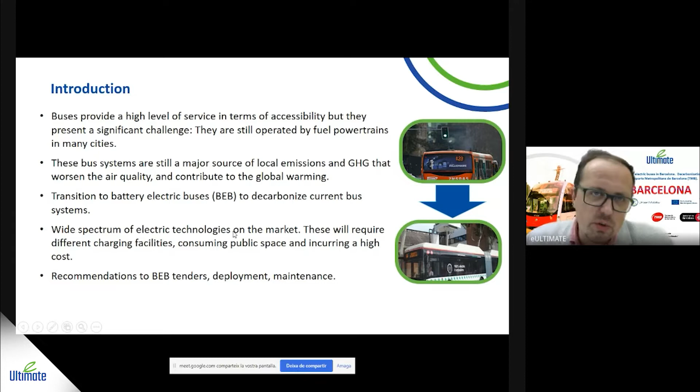From this wide spectrum of electric technologies on the market, we would like to identify which electric technology may match the constraints and the characteristics of each city. So our ambition is to provide this vendor agnostic decision support tool. And by vendor agnostic, we mean we are going to compare the performance of electric buses, but not in terms of branding or the name of one vehicle manufacturer brand.

No, we are going to compare performance, okay? For instance, charging schemes, overnight charging with regard to opportunity charging, batteries of capacity of 150 kilowatt hours against huge capacities of 400 kilowatt hours. So the idea is to provide this vendor agnostic decision support tool for assisting these cities and bus agencies in the deployment of the most suitable electric bus fleet technology.

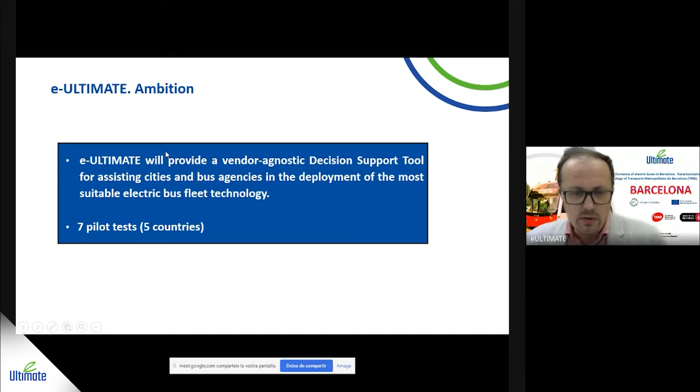And from this point, of course, later on, we are going to go to the market in order to identify which vehicle manufacturer can provide this kind of vehicle. In order to do so, we are collecting data from 7 pilot tests scattered in 5 countries. And the idea is this: which equipment to invest on to fit my use case. So this is the service that we would like to provide to fleet operators to identify the bus technology that matches and fulfills the requirements of the city.

And for OEMs and tiers, we would like to help them in the prioritization of the investment on the most outstanding technologies that will be leading in the future. In order to do so, we have 20 partners scattered in 5 countries, and the selection of each partner was made based on the different characteristics and particularities of bus operation in the cities. So we try to combine different technologies, different weather conditions in order to have data from very different situations.

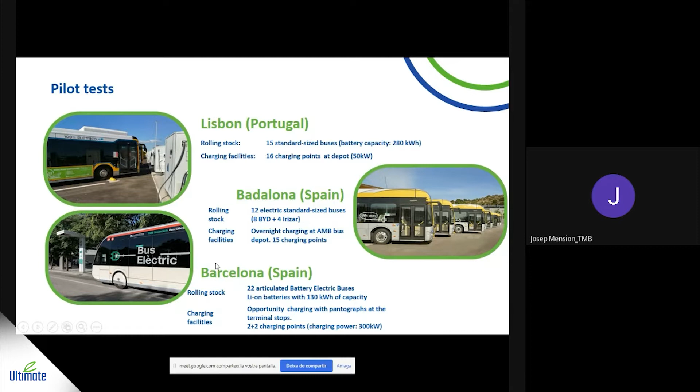And probably you are familiar with that. We have had several webinars and workshops devoted to each pilot test, Milan, Lisbon, Zalaegerszeg, and Badalona. And today, it's a pleasure for me to focus on the Barcelona site, in which we have opportunity charging. So probably this is the most different charging scheme that we have seen up to now. And we are going to analyze the performance of 22 articulated battery electric buses that are already providing service in this route.

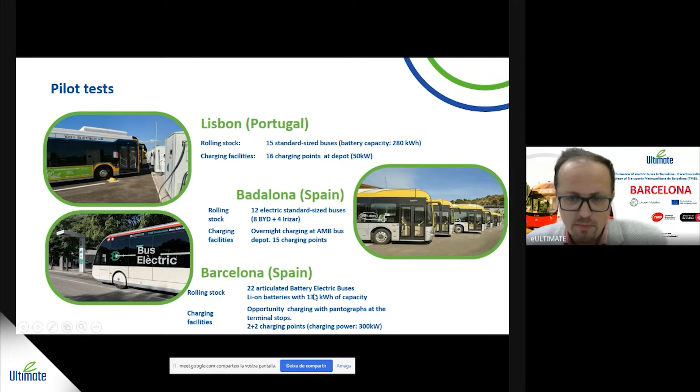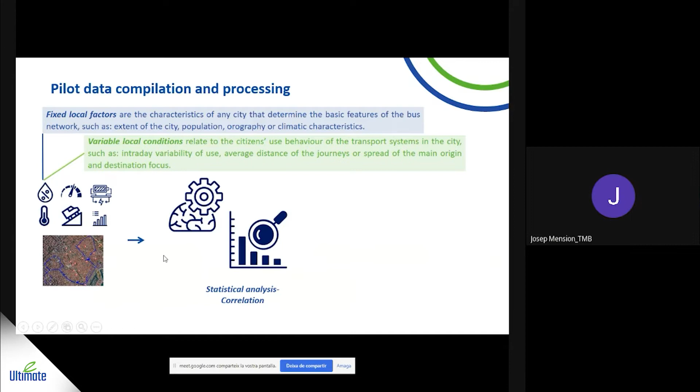Well, this is what the decision support toolkit looks like, and the idea is to gather data from the real operation. So we capture data from the telemetric system of the bus, and after this statistical analysis and correlation, we calculate the power during the whole trajectory or round trip of the line, in order to estimate the energy consumption factor in steps of 1 second along the whole line.

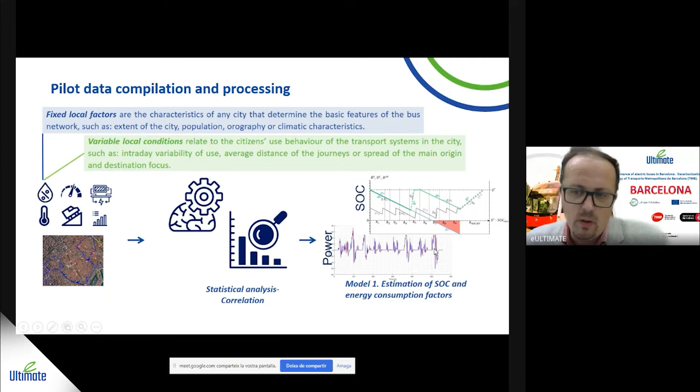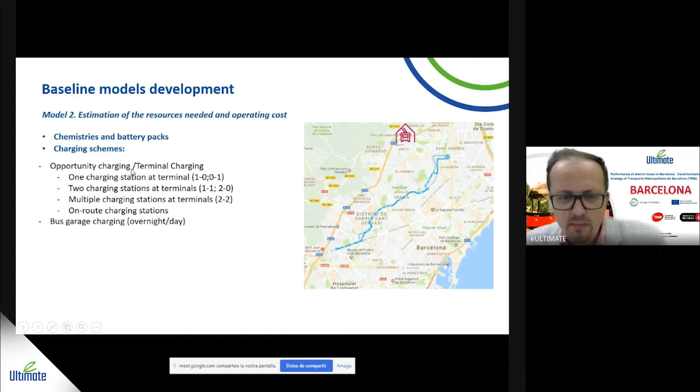And after that, this decision support toolkit is also aimed at providing cost estimations, or estimations regarding which is the best charging scheme between opportunity or bus garage charging, overnight charging, day charging, and which are the chemistries or the battery packs, the capacity of the batteries that are more suitable for the deployment in each route.

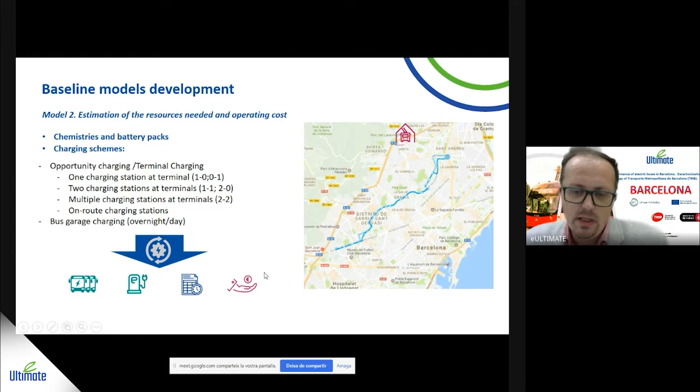So finally, we are going to provide estimations to the bus operators in terms of how many buses they will need, how many chargers should be deployed on street or in the bus garage, the schedule, so when these vehicles have to be charged at the bus garage or on street, and finally, of course, the budget needed to run the system. So that is what we would like to provide to the bus community, this decision support toolkit to help cities and bus operators in the definition of the most suitable electric bus technology.

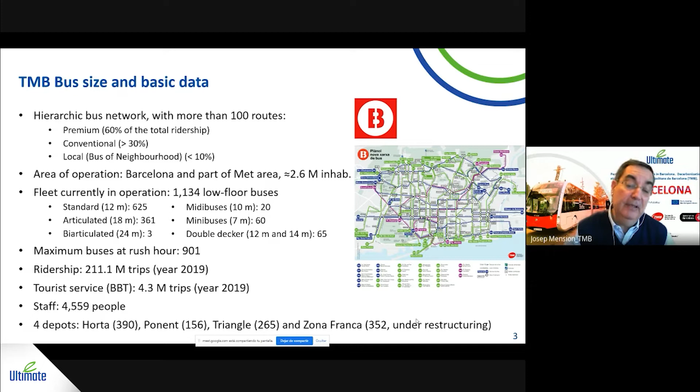Well, let's move to the TMB decarbonization strategy. I'm going to talk about the TMB Strategic Plan 2025, recently approved by the TMB Management Board. This plan gathers up the main guidelines for the next 4-year period. The plan assigns 4 guidelines specifically for the bus division: improve and increase the bus service; renew and enlarge TMB bus fleet with sustainability criteria, energy efficiency, and digital transformation; improve and adapt all infrastructure and systems for an optimum service provision, efficacy in maintenance, energy efficiency, and sustainability; and foster new mobility models, operation and maintenance that maximize service quality and intermodality.

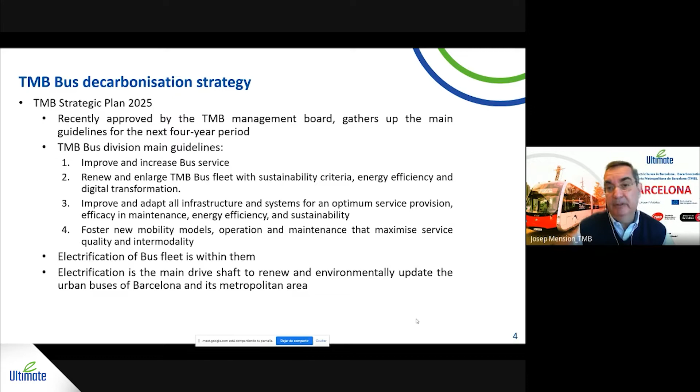Electrification of bus fleet is within them and is the main drive shaft to renew and environmentally update the urban buses of Barcelona and its metropolitan area. Well, now we'll be talking about previous and current developments. We had an active participation, in fact we are participating in EU projects as ZeEUS, Zero Emission Urban Bus System, but also ELIPTIC, electrification of public transport in cities, and ASSURED, fast and smart charging solutions for full-size urban heavy-duty applications. We carried out in the past studies for horizontal and vertical routes to determine number of chargers at the terminals and resources on the routes to meet the committed level of service. We tested several prototypes of high capacity, but also standard and small eco-buses.

We are currently participating in the JIVE 2 project, Joint Initiative for Hydrogen Vehicles across Europe, that seeks to deploy 152 new zero-emission fuel cell buses and associated refueling infrastructure across 14 European cities. We're also testing a prototype of electric articulated bus, 18 meters long, with overnight charging. We transformed Route H16 into a fully electric route in June 2021 with 22 articulated buses with en route opportunity charging stations at the terminals and opportunity charging chargers at the depot. At weekends as well, route number 7, which links Fòrum and Zona Universitària, is fully electric, and routes H16 and 7 share the en route opportunity charging station of Avinguda Maristany.

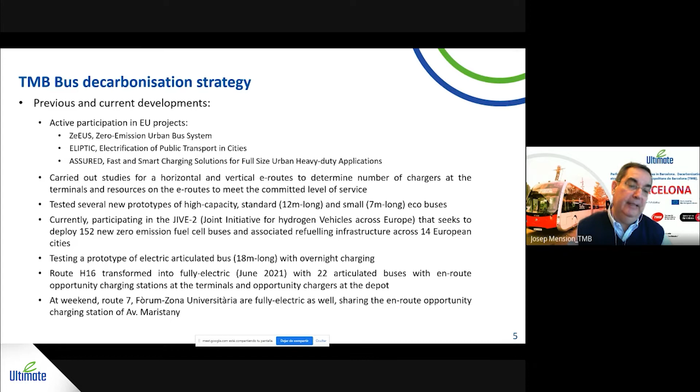Well, the main targets of the plan are the following. Purchase more than 500 eco-buses, CNG, hybrid, electric and hydrogen, in the period 2022-2025, including 212 e-buses. But by the end of 2024, only e-buses, hybrid and CNG buses in our fleet. Gradually, we'll install all the e-infrastructure at the depots, opportunity and overnight chargers, and in the street en route opportunity charging stations, plus smart charging tools to charge this large amount of e-buses optimally.

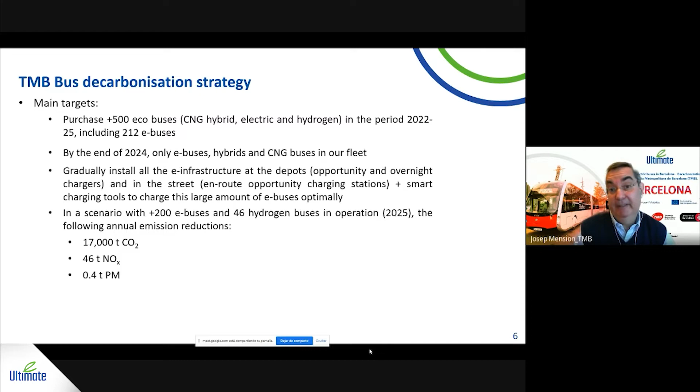In a scenario in 2025, with more than 200 e-buses and 46 hydrogen buses in operation, we foresee the following annual emission reductions: 17,000 tons of CO2, 46 tons of NOx, and 0.4 tons of particulates. Well, about our electrification schemes.

TMB is currently undertaking its electrification schemes, which consist of deployment of 3 en route opportunity charging routes with articulated buses. The first one, H16, that links Passeig Zona Franca in the southwest of the city to the Campus Besòs, to the Forum in the northeast of the city, is already in operation, with 2 chargers of 500 kilowatts at each terminus. And we use data from this route to supply the eUltimate project, the use case of Barcelona. At weekends, as I said, we also supply buses on Route 7.

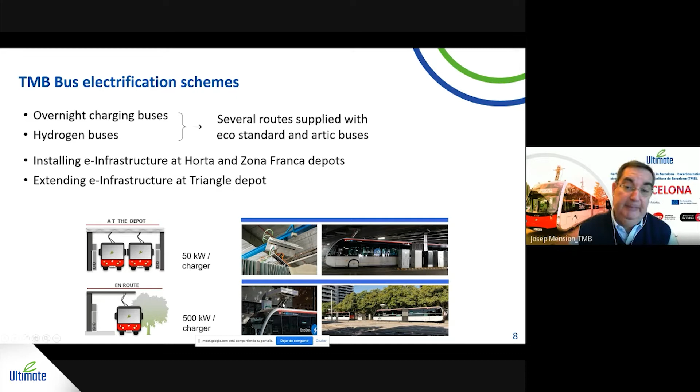Well, let's move now to our use case and talk first about technical data of Route H16. This is our current fully electric route that links Passeig Zona Franca with Campus Besòs. It is one of the 28 premium horizontal, vertical, and diagonal routes of Barcelona's new bus network. Its round trip is almost 26 kilometers. The headway is 8 minutes over a wide span period from 7 a.m. to 8 p.m. And this route is supplied by 22 artic buses.

And in 2019, before the pandemic, it transported a maximum ridership of around 20,000 passengers per week. Well, you can see on the slide the layout of Route H16 and the allocation on the premium route network scheme. Route 16 was launched in 2013 and was modified in 2014. That's why it is not totally straight on the right side. It turns at the corner of Ciutadella Park and runs along the waterfront.

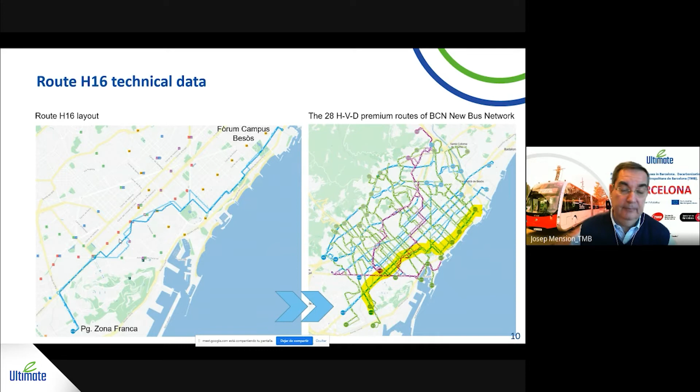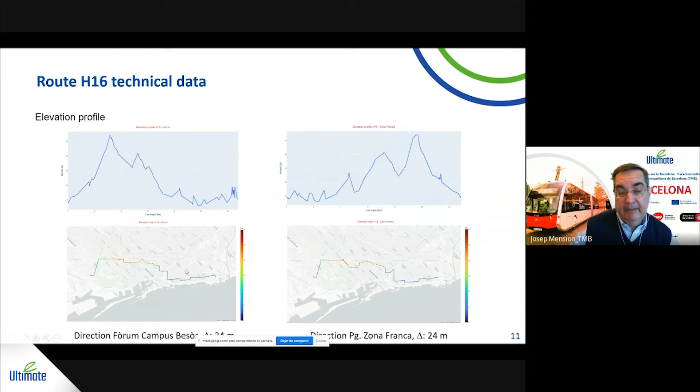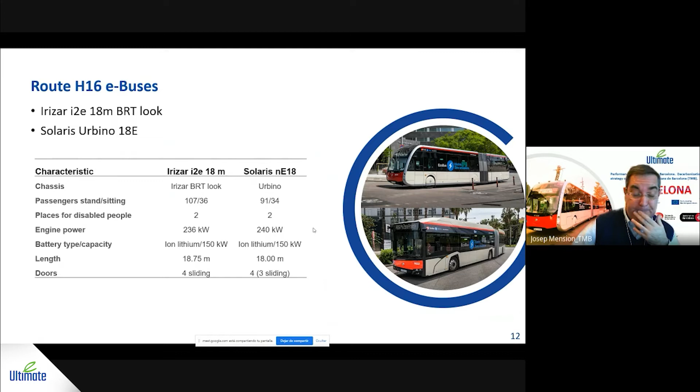Well, at this point, I'm going to show you a homemade video with some frames and pictures of these e-buses running through Route H16 and being charged at the opportunity charging stations during recovery times and at the depot. The depot is the depot of Triangle, one of our big depots. And in that video, there's nothing special, buses running and being charged and being stored at the depot.

But we like very much to show these images because this year we have at last a very powerful bus route, a very diametrical route with significant ridership, and citizens can enjoy this route and this mode of transport. And we are happy admiring and contemplating these sequences.

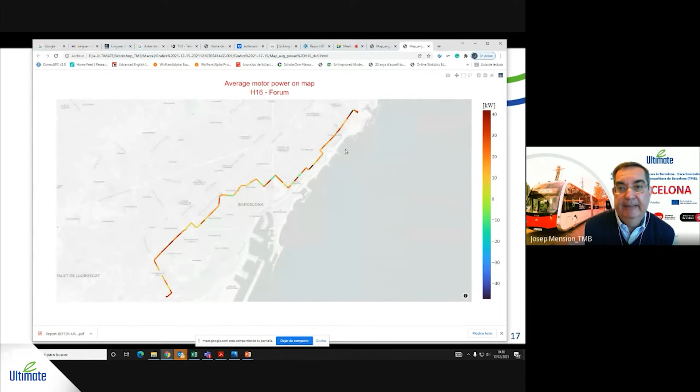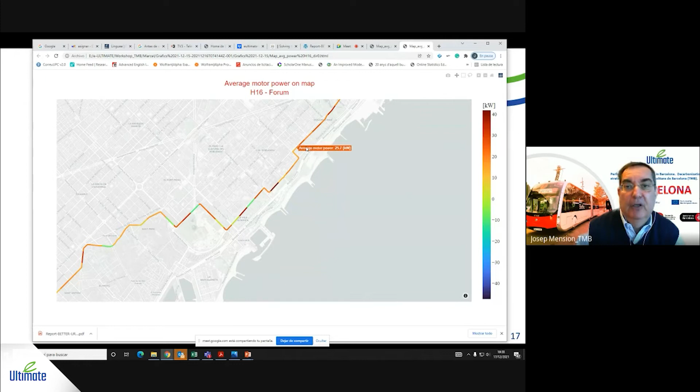And this is a very powerful KPI because knowing where the powertrain activity is within the high range, we can improve these sections to lower these figures and make these e-buses more efficient. I'm going to show you in more detail. Here you can see the itinerary of H16, and on each section the average motor power consumption, and we have to focus on the red because they are the sections with more consumption.

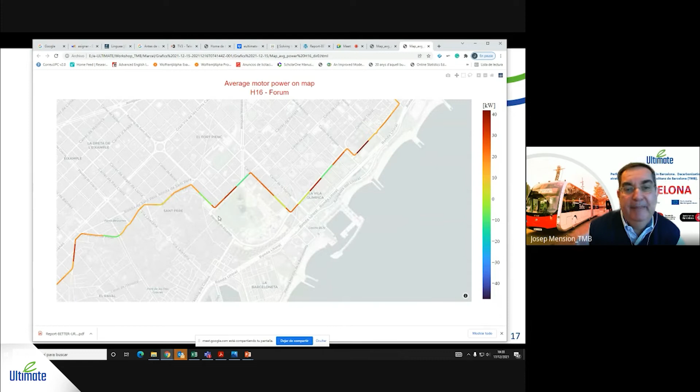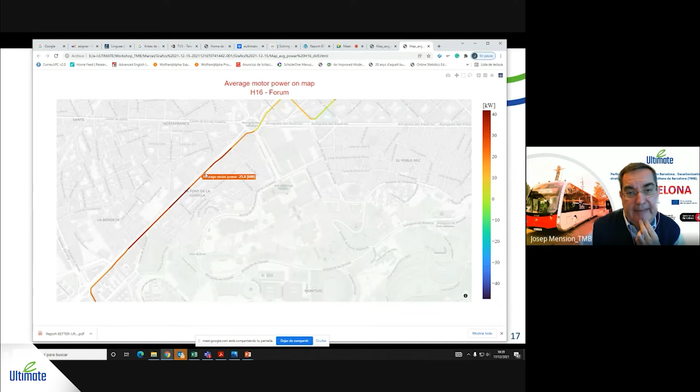The idea is to make some actions in those areas, just to let the buses run more efficiently. This is, as I said, a very powerful tool to monitor and to follow the evolution of the performance of the fine tuning of the operations of these buses.

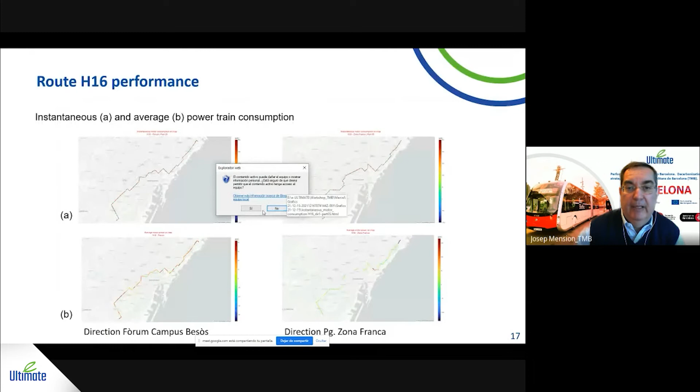Well, let's talk now about the definition and some comments about these other eKPIs: energy, temperature, SOC discharge, and distance. Well, the energy consumption in kilowatt hours per kilometer. The reason for the variability is the auxiliaries, the air conditioning, the lights, the driver heater, etc.

An average value can be about 1.2 kilowatt hours per kilometer in the coldest month, and 2.5 up to 2.8 kilowatt hours per kilometer in the hottest month. The current consumption of electric vehicles is more or less as expected and allows us to give the service perfectly, saving a reserve if unforeseen events arise. The difference in consumption between summer and winter in the city of Barcelona is completely understandable due to the demanding air conditioner consumption.

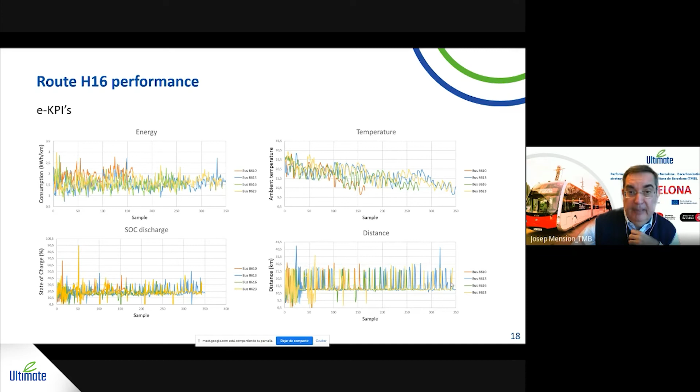Well, my conclusions regarding the H16 performance are the following. First, we can say that Route H16 performs quite well. Main operational KPIs from January onwards show similar values to the previous month. The e-buses perform quite well, and there are no significant interoperability problems between e-buses and chargers, with the en route opportunity charging stations and opportunity charging at depots.

The electric consumption values are within the range as had been foreseen, and our opportunity charging stations at the terminals are well sized, with 2 chargers each and 500 kilowatts per charger. And thus, charging times are as scheduled, and no significant queues arise during refueling. And all of this secures on-time departures at the terminals.